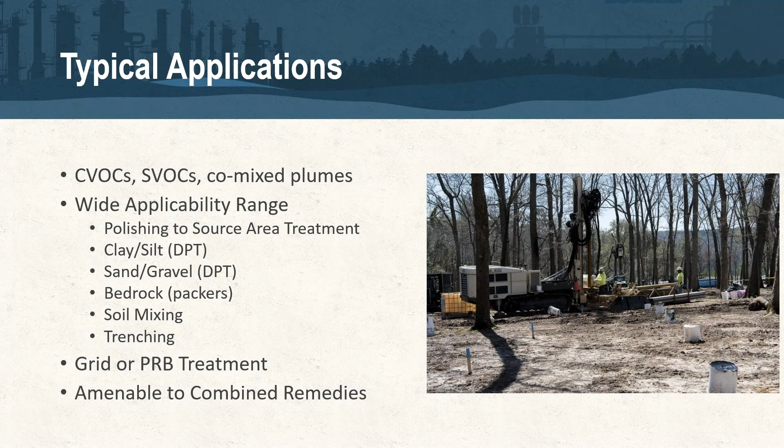So let's focus on the technology. We're going to revisit the trap and treat concept, and that's primarily just to discuss the activated carbon component of these two products we're dealing with here today.

Some of that is to dismiss preconceived notions or misunderstandings of using activated carbon as a tool. Probably the biggest thing to note with RPI's products is this is trap and treat. It's not just trapping.

If you would like to trap a contaminant, sequester it away in the subsurface, you could use standard activated carbon. Everything we're doing here today has a treatment component to it, and that's really our goal. We don't want to sequester something and leave it in the subsurface to be dealt with biologically for years and years and years. This is something we want to go in and concisely treat, and have a mechanism to do that with.

So be it known that this is the only portfolio on the market that has a treatment mechanism installed on activated carbon. And with that, if you haven't used activated carbon before, it is a really powerful tool. Probably the most important part about installing a carbon platform into the subsurface is that we're immediately going to remove groundwater mass. You would see that with any type of activated carbon installation. However, it's the treatment component that goes along with that which really facilitates the powerful activated carbon platform.

When these go in situ, we're immediately disrupting the soil groundwater partition, and we're also using groundwater as a transport mechanism to drive soil desorption of our absorbed contaminant mass. And that's really the key to these technologies, is getting that soil mass off into the dissolved phase and moved onto the activated carbon. Because if we can't transport it to the site where we have treatment, we can't do anything other than trap it.

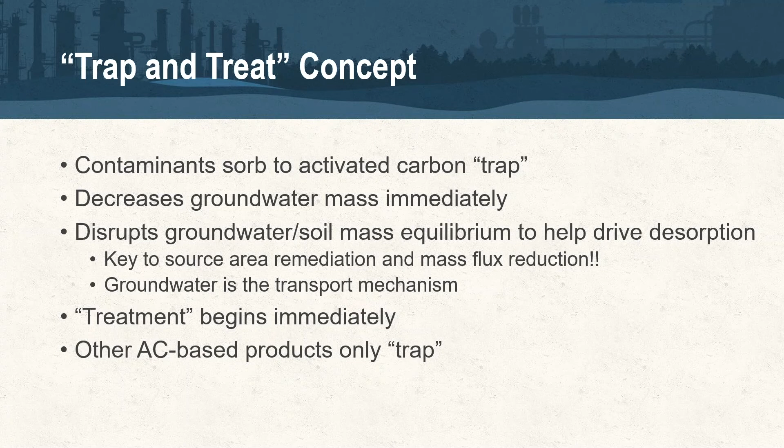If you're not too familiar with activated carbon, just wanted to cover a few things, again clarifying what we're doing here at RPI Group. We are using food-grade coal-based activated carbon, and the reason for that is a lot of the contaminants that you deal with, whether they're chlorinated today or possibly another contaminant covered in another webinar, have very high demands on the carbon platform.

So you want very high carbon absorption isotherms. And with that, we use coal-based activated carbon because it has much higher absorption isotherms than even cellulose, wood, coconut, or other things available in the marketplace. So anytime you're putting a product in the ground, you want the most bang for your buck. That's why we're starting with coal-based activated carbon.

I put a note in there: we always use virgin activated carbon. I know from a sustainability standpoint, a lot of us would like to use regenerated activated carbon. Unfortunately, due to typically high heavy metals content in regenerated activated carbon, that's just not something we can do at this point. So all these are virgin activated carbons.

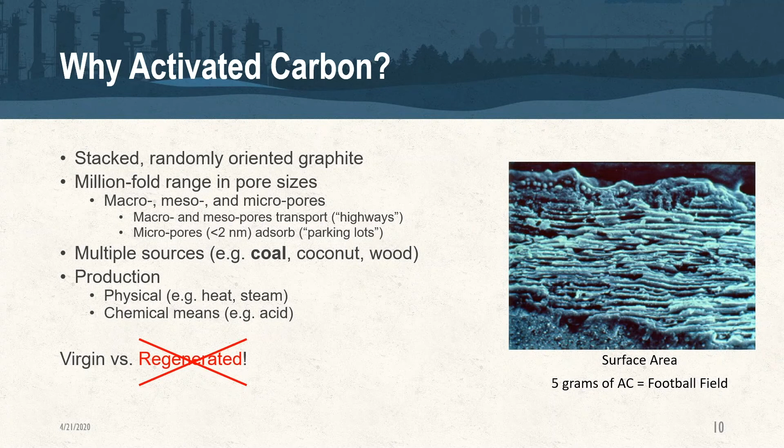And just as a note, I really like that picture there on the right. When you're looking at the powerful platform that is activated carbon, there's a lot of surface area to work with. I really like that note there that just 5 grams of activated carbon has the internal surface area of a football field. So that's a great way to think about how powerful this tool is.

The second thing in dealing with activated carbon is we have to concern ourselves with not just what contaminant we're treating, but other contaminants in the mix and also their respective concentrations. So a lot of times when you work with RPI Group, you're going to hear us talking about acquiring speciated data, whether it currently exists for your site or developing it as we move through an RDC, remedial design characterization, or further investigations to augment your CSM.

But just as an overview here, I like this example comparing the concentrations of vinyl chloride and cis-DCE and the capacity demands they would have on the activated carbon platform. You can see just at 10 micrograms per liter, there's an order of magnitude difference on the capacity that carbon can absorb between vinyl chloride and cis-DCE. So again, this is just a very rudimentary example, but it's a good example of how important designing the carbon platform capacity is for your site.

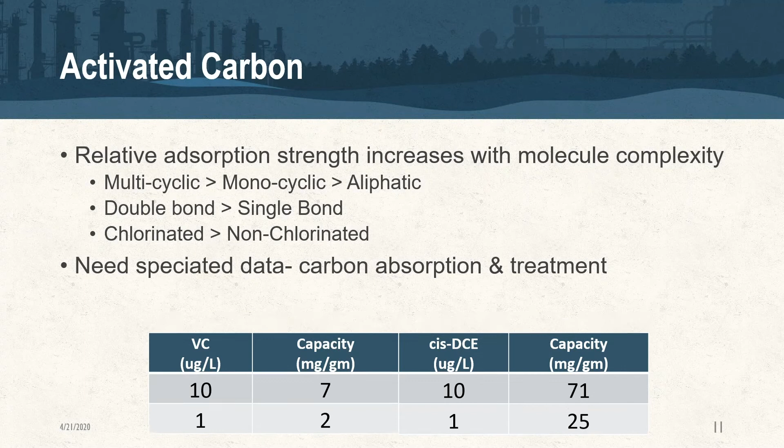A little bit more about this product. These are food grade activated carbons. We start for BOS100 with granular activated carbon, and then we impregnate it with metallic iron.

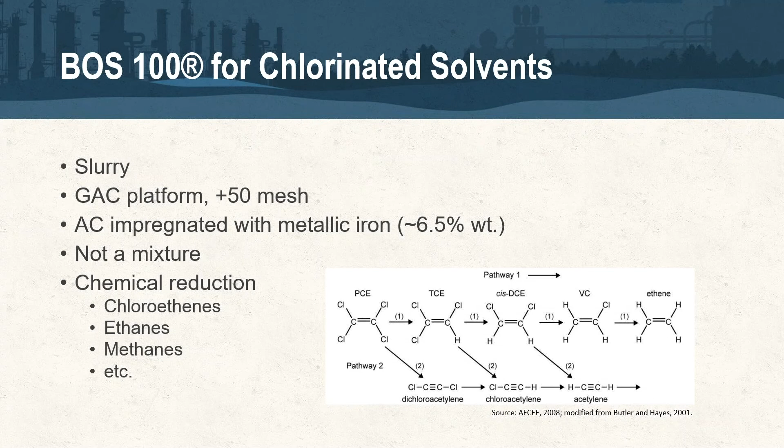Giving it about a 6.5% by weight combination. Now, I do want to say that this combination is really a fusion, not a mixture. That's important to note, because if you combine activated carbon with any other type of treatment mechanism you'd like to utilize in situ, you're going to sequester it away on the activated carbon. There's no treatment mechanism available within a plain activated carbon, so you're removing it from the one you're installing if you just co-mix it. That's an important thing to note - you must have your treatment mechanism directly on the activated carbon platform, which is really why we're here today.

The next thing we get asked a lot is, you're talking about metallic iron - how does this compare to more traditional iron treatments on the marketplace today? This is really where I'm going to drill down on using the two in conjunction with each other and the fact that they are one product. It's a fusion of technologies, literally.

What you see here in that first bullet point - activated carbon - we need this to drive degradation rate. That's the most important part of this. When you use activated carbon, you're concentrating your contaminant on the activated carbon platform, which means you can enhance your degradation rate. The second thing to note is because this is carbon fused with iron, they become one and the same. So this becomes an enhanced electron transfer system. You need the two working in conjunction with each other, not just to trap the contaminant, but to treat it.

In terms of the availability of iron, whether you use a traditional metallic iron amendment like ZVI or BOS100, we get asked a lot - what about surface area and reactivity? What about longevity? In terms of longevity, we've got a lot of data available at this point showing that we can go a decade or more in terms of performance and longevity of that iron in situ. So we're not going to have some of the depletion and oxidation issues that we would with other traditional iron amendments.

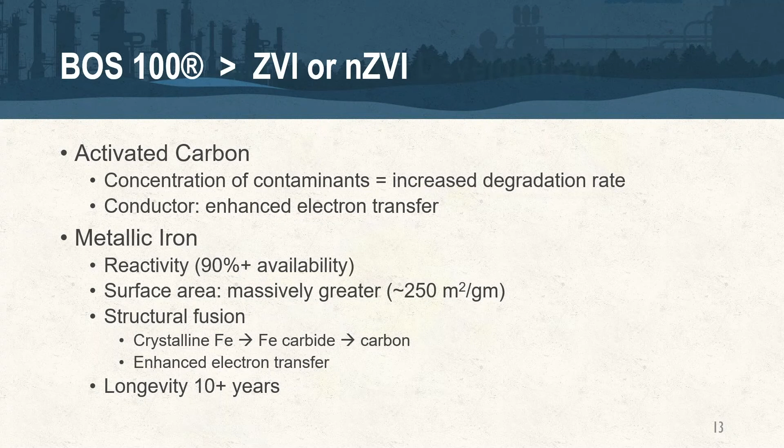At its heart, we're starting with BOS100, and then we're adding electron donors, yeast extract, and two different bacterial consortiums. Each of those does two different things - one focuses on the generation of electrons, and the other focuses on a concert of degradation of the cVOCs in situ. So think of these as, while they are originally separate entities going into the mix, when they get into the mixed tank and installed in situ, this is a concert of activities working together to drive expedited cVOC degradation.

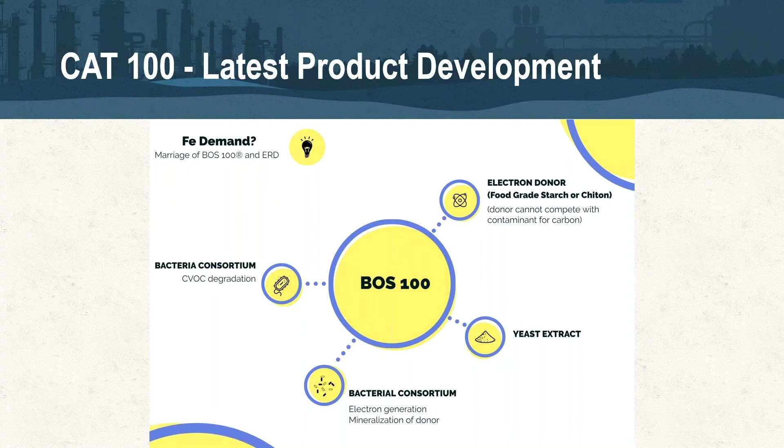So I'll explain a little bit of that process here. Aside from electrostatically binding the compound you're dealing with to the iron on the activated carbon, we have to generate electrons, because if we don't generate electrons, we're going to start depleting our iron. The way we preserve the iron is this generation of electrons by the fermentation of typically food-grade starch, occasionally chitin, by our first facultative blend of bacteria.

People ask us a lot how we came up with the naming for this product. Well, CAT100 is really short for catalyst, because that's what this is. That fusion of iron and carbon together works just like a conduit in the walls of your house, your office. It's transferring the electrons we're generating to the site where the contaminant is bound to the structure, and that's our degradation process. What we're doing here is, by the continuous generation of electrons, we're transferring them into the structure of the activated carbon and iron.

This is our electron pump. So while food-grade starch is going to very slowly break down over time, it's going to be a great electron donor for this system. If you were to continue to keep those starch levels monitored and bumped up, you're going to look at this as essentially an electron pump in perpetuity.

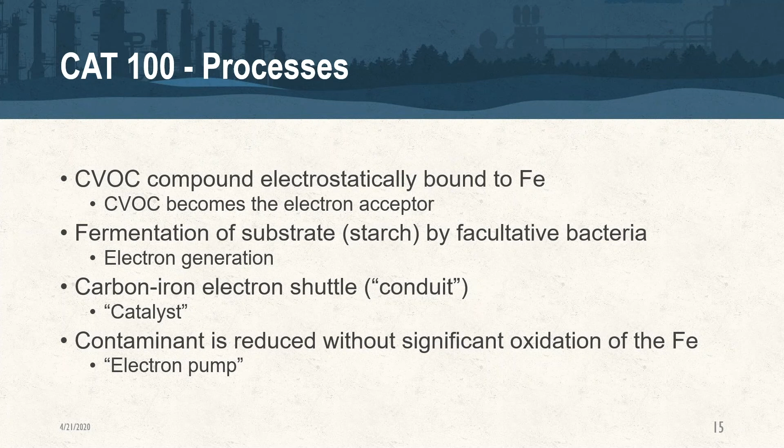You could theoretically keep this system moving. That's how powerful this is. So again, we're not depleting the iron here, we're preserving it.

So this is really good for sites where you've got DNAPL, mixed plumes. This facultative blend of bacteria can be adjusted based upon your site to handle, if you're doing more than just cVOCs, if you're doing SVOCs, even chlorinated SVOCs, and other compounds as well. So this is something we can tweak through the design process, through the site assessment process, to really make sure it's a good fit for your site.

We've used CAT a lot for source applications, but we've also started to use it in the last 4 years on PRBs as well. We do have some case studies we can provide for those, but it is pretty versatile. We find a lot of uses for it, especially when we have significantly impacted areas or plumes that we have to bisect.

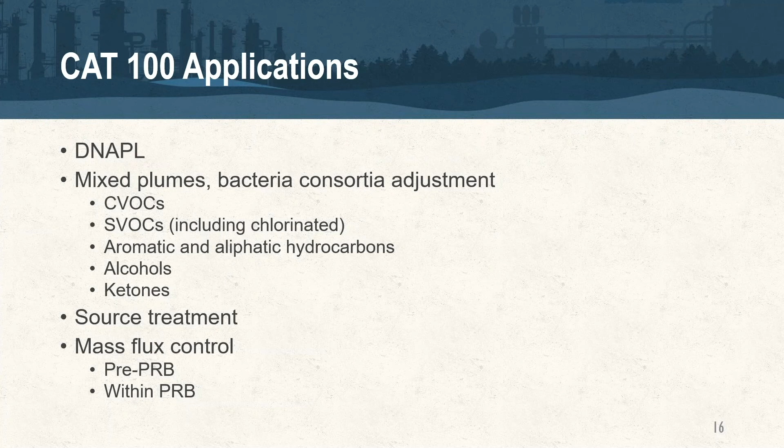And the last thing to note in this section is, I talked about having a treatment mechanism combined with the trap of the activated carbon. Again, it can be very hard to determine, at least at the outset post-installation, what type of treatment you have going on. Because if you inject activated carbon into the subsurface, you're going to clean up your dissolved phase. You're going to see depletions in your groundwater monitoring, but how do you actually know you've got treatment going on?

So we've come up with a number of ways to do that here. These are not things that we invented ourselves per se, but these are typical monitoring parameters that we use for a lot of projects. Total mass, we don't always have the ability to go out and take a probe back out with us post-installation. Sometimes we do. That's a real easy and nice way to go about monitoring treatment. Dissolved gas generation, volatile fatty acids.

There's some other parameters we use for both BOS and CAT100, also BOS100. All those can easily be collected and monitored in the field through your VOA vials post-installation. So it's not an invasive way to go about this. This really complements your post-monitoring analysis. But here's some of the things we use.

More recently, we've also started working with MicroBac Laboratories. We've done some CSIA analysis and other microbial diagnostics. That's certainly something I would implore you to reach out to both Aaron Peacock and Scott Noland about. They gave a great presentation for our first two webinars about some of this. And if that's something you're interested in for your site, they could talk to you about that.

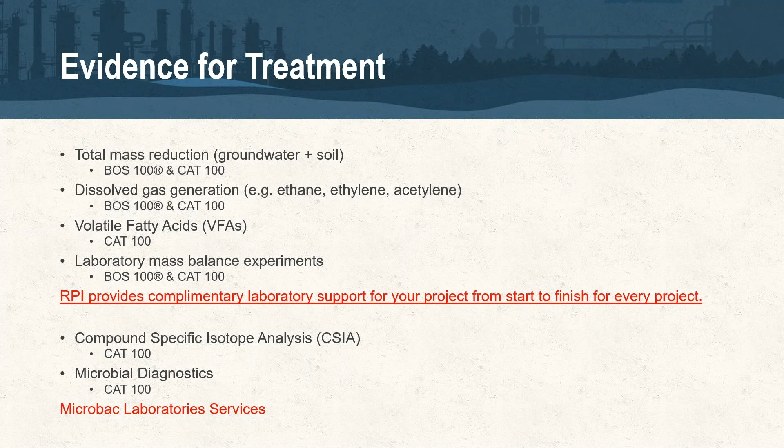So we talked about the importance of both product and design and installation. And here we're going to focus on the design component. Just earlier this year, ITRC released their Optimizing Injection Strategies and In Situ Remediation Performance document. It was very comprehensive, very well done. And one of the most important things for us we saw in there was the description of remedial design characterization and how it's a great tool to use.

Shortly thereafter, Scott and I talked about this on the phone, and he gave me this quote, and I really think it's salient because a lot of the times that we have sites that become recalcitrant, it's because we don't have an accurate snapshot of the subsurface. We have a CSM, but maybe it's predicated upon limited soil data, long well screens. You're trying to use high resolution tooling outside of the way it's meant to be used, or you're trying to interpret an electronic output signal as a quantification of impacts in the subsurface, which you can draw correlations, but it's still at the end of the day, you have to use wet chemistry to determine it.

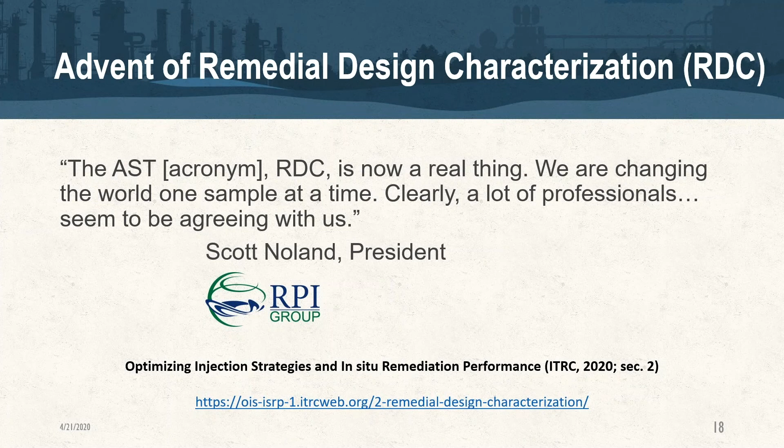So one of the reasons I like this is because it shows you the value of doing a little bit more work up front with an RDC, which is something we've been doing here at RPI Group for a decade now. And this is borrowed from ITRC, again, it's in that recently published document. I think it's just a nice example of showing you how you end up with both cost and time savings by spending a little bit more upfront, or you can see in that shorter interval of time mid-project, that gets you to a completion and time savings a lot quicker.

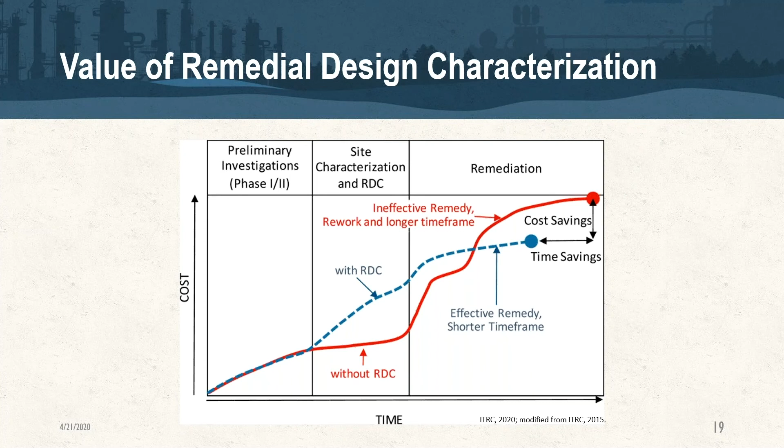So when you hear those of us within the RPI group talking about this, it's not just to take more soil samples, it's not just to spend more time on site, it's to gather an accurate snapshot of what's going on in the subsurface so we can assist you with the design.

With the design, we get asked a lot, can these products handle DNAPL, if it's BOS200, LNAPL? We talked in a previous slide about how we go about doing that, but at the end of the day, the reason I brought up the RDC is that is the way we deal with DNAPL. If we know where it is, if we know the concentrations we're dealing with, we can start to look at ways to design around a treatment design and plan for that site. A lot of that revolves around knowing the mass, location. Some of this will be covered in an RPI or RDC specific webinar coming up in a couple weeks. But this is really how you get into understanding the treatment mechanisms available to you in situ with these products, and then finding a way to use them on your site.

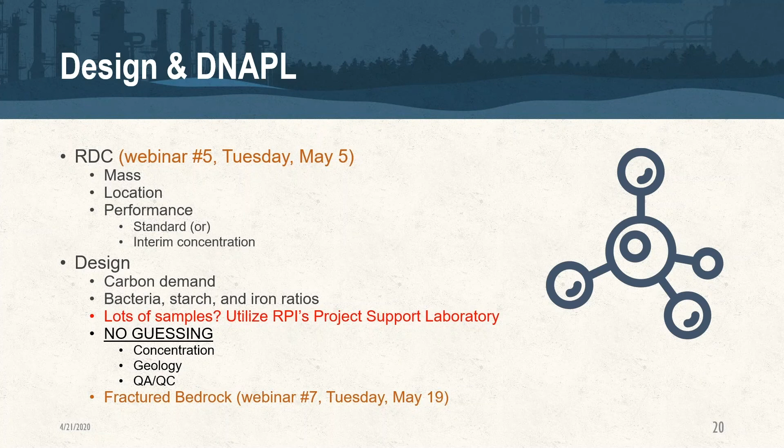One thing I like to call out here is RPI has available to our clients the project support laboratory. We get asked a lot, is there a cost with sending them samples? And there isn't. I know some sites we've sent a lot of samples. We had a site up in Michigan just last year in 2019, we sent almost 1,200 samples to RPI's lab. That was all conducted at no cost to the client, but it helped them come up with a design where they were able to address a very long chlorinated solvent plume with a source area and two-stage PRB treatment design. Again, this is all things that you're going to talk about with us when we're working together, and this is one of the ways through utilizing RPI's Project Support Laboratory that we help you minimize your costs through that RDC.

In terms of installation, again, I mentioned at the outset, these are slurries, so they will require different equipment. They will require different training for the field staff. Through the RDC, we have a precise injection plan, which helps us. But at the end of the day, the installation is still the most important part of the overall design. So working with the RPI group, we've developed best practices. We've developed techniques. We've got specific equipment that you won't find off on the shelf at Ferguson or Home Depot, Grainger, places like that. These are custom-built systems meant to put slurry in the ground.

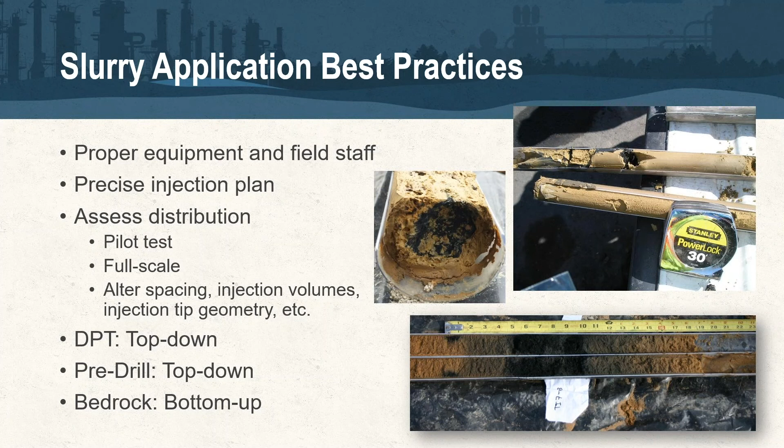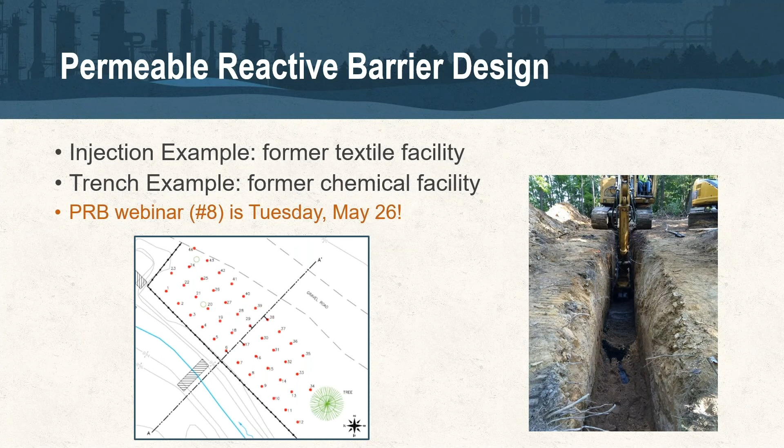Here's a little picture grid of injectable PRB. Most times, we're going to be looking at 3, 4, or 5 curtains within that PRB. Again, it's all about contact, but with the proper design, an injection plan, and the right products from the RPI group, you can accomplish the exact same thing you're doing with a trenching application with yellow iron. You can accomplish it with an injectable PRB.

The next thing I want to touch on real quick is the pre-drill example. This is something the RPI group's been doing for a long time now. Think of pre-drill as when we can't access targeted depths or the top of bedrock that we need to or want to, based upon either natural or man-made conditions. Pre-drill is great for cobble zones, glacial till, urban fill, anywhere where you get refusal just using a standard DPT rig. Roughly what we're doing here is we're pre-drilling the site using either augers or sonic to achieve our targeted depths, backfilling with hydrated bentonite. And then we actually use a DPT rig to go through that bentonite to inject in the formation.

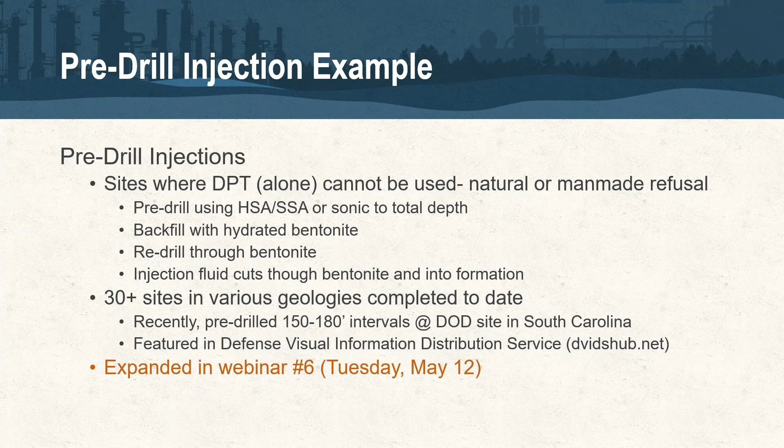This has been used at sites with some of the issues we just talked about, and we've also used it in heaving sands. You can see there's a note there. We recently did a DOD site in South Carolina - that was the heaving sand site. We pre-drilled using sonic to 180 feet plus at a lot of locations there to install a PRB for chlorinated solvents. Again, if this is something that interests you, join us on May 12th for the pre-drill webinar.

All right, so we're going to move over. We're going to look at a couple case studies here, and then we'll take some questions. First one here, our former military site.

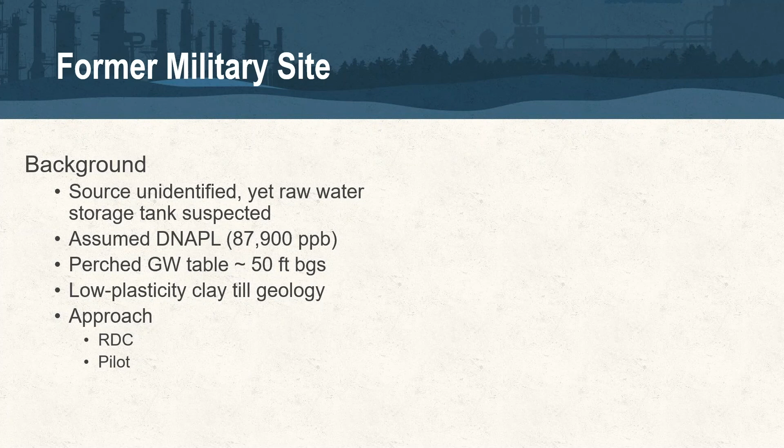This project had an objective where we needed to evaluate the effectiveness of BOS100 for the remediation of TCE and potential DNAPL as well. We had saturated soil, a perched groundwater table. We're specifically looking around - see in a second here on the map when I pull this up. There it is - you'll see that we're dealing with an area around MW18. So focus on the next slide around the grid that shows up in the upper right.

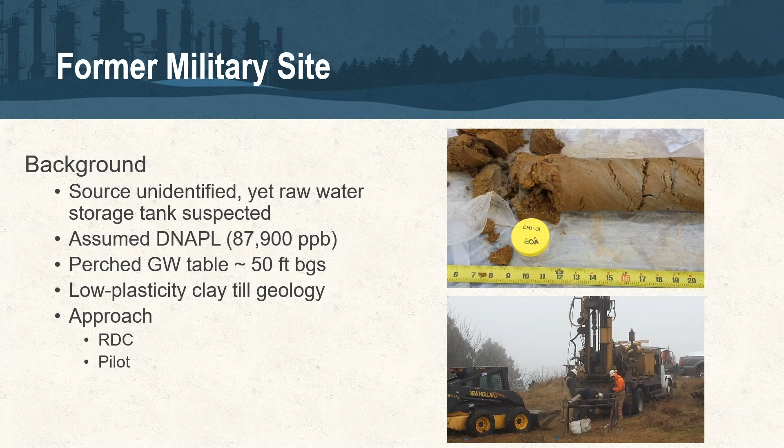Part of this approach, we had DPT refusal, so I'm including this as an example since we just talked about pre-drill. Pre-drill is something we used here at this site, both to achieve depth but also distribution. In terms of what we did here at the site, we installed 4 monitoring wells.

We also used a Solinst continuous multi-channel tubing installation - that's a multi-level well. Some other challenges we dealt with: there was a historic borehole right in the center of where we installed a 5-foot grid for injection. Unfortunately, it wasn't abandoned well, so we addressed those issues on site while completing some of these injections, trying to improve its abandonment to minimize any daylighting that would come up through that improperly abandoned borehole.

We also did a pilot test. This was a couple years ago now, but the idea is to do some long-term performance monitoring and then have a full-scale project funded at some point in the future, which we just got notice recently that we are going to do. In terms of this pilot, which we conducted in 2016, you can see from the upper right we varied our grid spacing.

This is to evaluate distribution, product loading, and efficacy of that combination. Again, this is just a pilot scale phase. We were able to get really good distribution though. We had extremely good flow rates - you can see there from 35 to roughly 85 GPM.

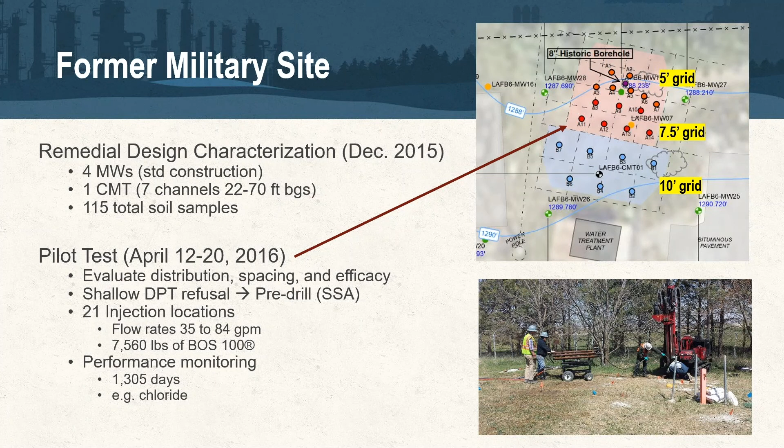And then here we are on this slide, we can talk about the performance monitoring. Again, we're at 1,300 plus days here, and we see significant reductions. I like this graph here that we've put together, because while that initial precipitous drop-off would be indicative of using an activated carbon platform, you couldn't achieve this significant degradation and reduction over that term period without the combination of the activated carbon and iron.

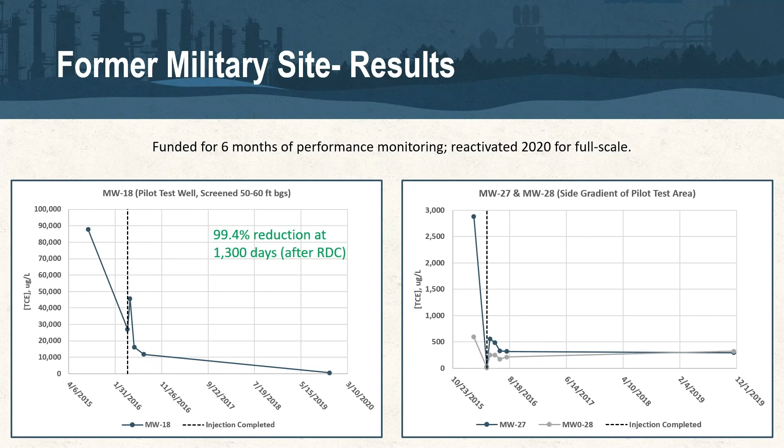So this is exciting. This is going to be reactivated this year, hopefully for a full-scale event. And this was a really good pilot for us at this site.

And I'll close with a brief overview of a former manufacturing site in the Midwest. I'm going to look specifically at this interim remedial measure we conducted. You'll want to focus here on that blow up. MW71 is close to our source area there - it's a former degreaser. MW63, while it's still within this IRM area, is another measuring point for us.

As we go through this, we're going to look at some concentration data, some biological activity, and some other parameters we use to monitor performance in subsequent slides here. But just as a brief overview, we had significant saturated soil, groundwater impacts. Immediately due to those concentrations, we selected CAT100.

From our design there in the middle of the screen, you can see that's 215 direct push points. Again, that sounds like a lot of points to install, but we're not limited by how fast we can pump - we're limited by how much we can probe. By that, I mean pumping times when we're doing these injections are on the order of 20, 30 seconds, whereas traditional injections take a lot longer when you hook up to an injection well or other form of injection.

What we're doing here is we're probing as fast as we can. We're doing our injections, so this is distributed typically at every 1.5 or 2 foot intervals, and we're doing this on 5 foot centers.

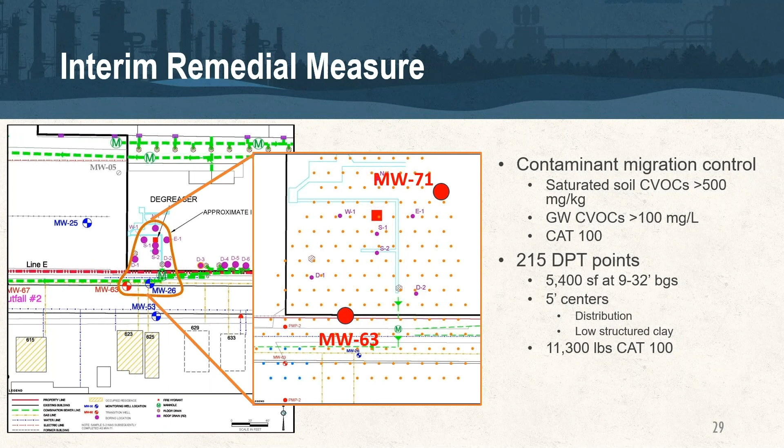As you can see on the left, we have receptors there in the form of row homes immediately off site, across the street from this location. So let's see how we did there.

Here's MW71. You can see an immediate post full-scale injection, an immediate precipitous drop-off of TCE. And then roughly in a 4 or 5 month period, we really start to see the biological degradation of the CAT100 kick off. This has been recently updated, and obviously you're seeing some pulses here.

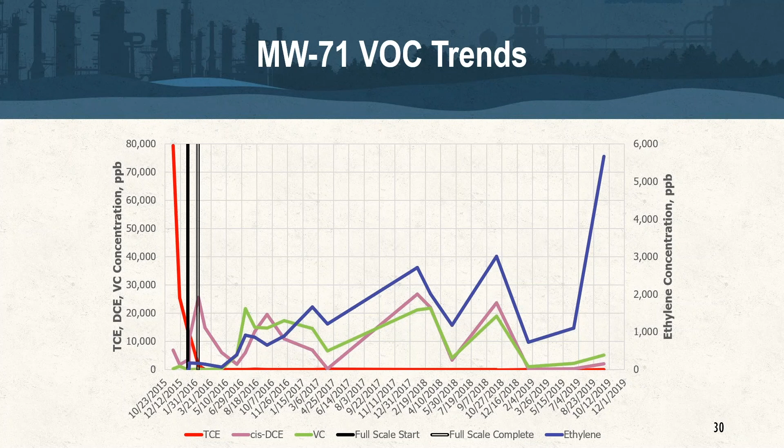Now, when we see these type of graphs, we don't consider these spikes to be rebound. That's not the way this technology works. When we see these minor spikes in concentrations, we know we're getting transport off the soil, finding void spaces where maybe some DNAPL is located. Again, we want to bring it into the groundwater to use as our transport treatment mechanism, to bring it to the activated carbon, where we have that mechanism available to us. So this is some really good data here.

Another thing we do commonly is chloride. That's a really simple parameter. We talked about that earlier. Here's that graph for this site.